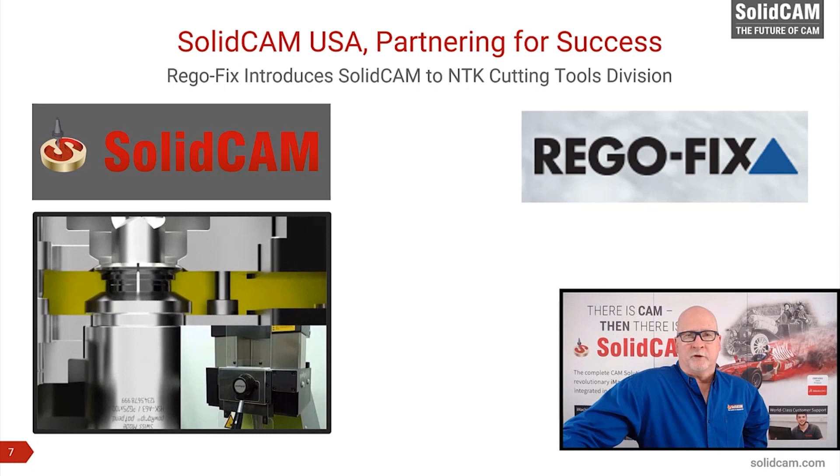Now, we do a lot of cross-promotional marketing with them, and we share booth costs at several industry trade shows. They've also introduced us to other valuable business alliance partners. This is one of the real benefits.

One example is the work that we're doing with Rego-Fix and NTK cutting tools. NTK is a division of NGK spark plugs. You may have heard of them. But the NTK cutting tools division, one of the tools they make is a ceramic end mill. It's a special recipe of silicon nitride. This doesn't even feel like a real tool. It feels like a piece of plastic when you pick it up. But what it can do in ultra-high temp alloys when combined with iMachining and Rego-Fix holders is nothing short of amazing. This material in this video is Rene 65.

It is used in jet engine hot section parts, and it sees some of the most extreme heat and pressure known to man during flight operations. A typical carbide tool, even when used with iMachining, is very limited in performance and has an extremely short tool life in this material.

Now, NTK, with this ceramic tool, was able to improve performance and tool life over carbide by about a factor of 2 with traditional tool paths, and even 3 to 4x with all of iMachining's competitors. They still had to do an awful lot of editing in the NC code to get it to work.

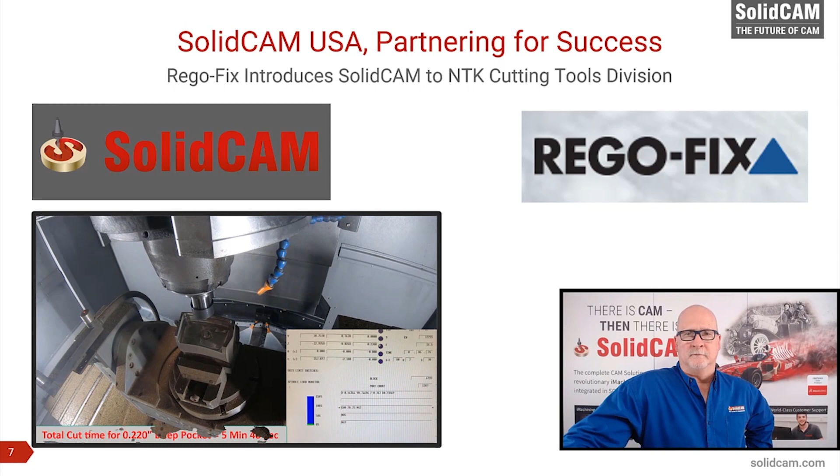You know, sometimes convincing partners to believe in SolidCAM can be challenging, especially with the way things are in the market today. But hey, have some fun with it. Get creative. SolidCAM will not let you down.

In talking with Yvonne at SolidCAM CZ, he related an interesting story to me, and I wanted to share that with you today. Back in 2015, Yvonne had some business alliance partnerships with some important cutting tool manufacturers like ISCAR, Gühring, WNT, and others. Unfortunately, these partners suffered from what we like to call the iMachining disbelief syndrome. This is a common affliction, but it can be a lot of fun to cure.

Being focused on and actually quite proud of their cutting tools, they were not willing to believe that iMachining was any different than any other CAM system offering. They figured that our testimonials were just exaggerations, marketing lies like so many of the others in the industry.

So Yvonne came up with a brilliant plan. He really wanted his business alliance partners to be excited about SolidCAM. So he thought, get them to compete. Challenge their confidence. And so he offered them an opportunity to test their tools and their expertise against iMachining.

Do your best, he said. Use the best approach you know and run your tools to the max feeds and speeds, the best you can get out of them. Then let me run them in iMachining and we'll compare the results.

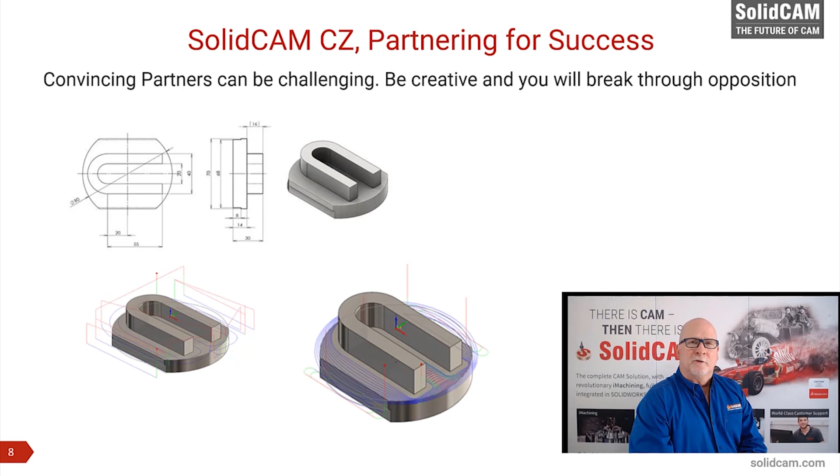So Yvonne chose a good machine, a DMG Mori. He got a DMU 65 monoblock. And hey, no one can complain that the machine was insufficient, right? It's definitely up to the task.

So Yvonne made the rules of engagement very, very simple. Use any solid carbide tool with traditional toolpath techniques and optimize them. He was going to use their 8mm diameter tools, using them with iMachining.

Now, they did the machining at the University of West Bohemia in Pilsen, with the professor of the university overseeing the contest, so this made it fair. And they used several materials ranging in hardness and toughness. They even gave the ISCAR team an advanced day to practice and perfect their approach. And Yvonne and his team showed up the next day and used default settings in iMachining.

The results were amazing. SolidCAM won hands down in all categories. Yvonne has all the results and the information if you're interested in seeing the details, but here's just a few bits of information.

An interesting and surprisingly common discovery was made in this challenge, and that was that iMachining is outperforming the other guys with about half the diameter of the tool that they're using. Now keep in mind tooling costs. Larger diameter tools cost significantly more, so this is a fantastic side benefit that can be gained also.

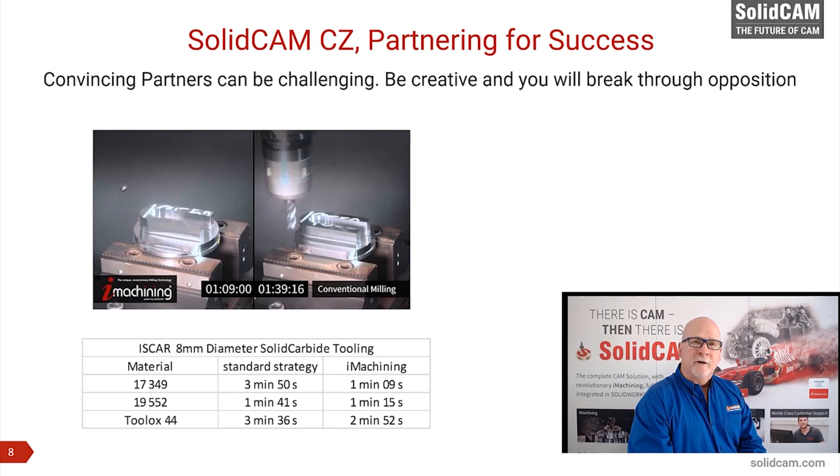Now, as you can imagine, with iMachining outperforming the traditional strategies by 30, even up to 300%, it's easy to see how the cutting tool manufacturers were converted to believers in SolidCAM. Now they are actually some of Yvonne's greatest promoters of SolidCAM and iMachining.

So work with your business alliance partners, because working with business alliance partners and customers for that matter, and helping them to understand SolidCAM's value can be some of the most fun and rewarding work that you'll ever do. So enjoy it. Build those relationships. Grow those relationships. Everybody's going to reap the rewards.

Building a great partnership takes a significant amount of time and effort. That process is not wasted though, for there will be times when that partner will bring you in on a project that demonstrates the value of your efforts.

Gordon from SolidCAM UK related a story to me just the other day that is just such a situation. Their long-term relationship with ISCAR paid off in a big way for both them and for a new customer in this case. As Gordon tells the story, the real partnership driver in this case was ISCAR. Now he says that ISCAR is their longest partnership and one of their most influential.

An opportunity came about in which a world-class hydropower turbine manufacturer, a company called Gilbert, Gilkes & Gordon, generally referred to as Gilkes or GG&G, had decided to bring turbine runner machining in-house, and they were looking for solutions.

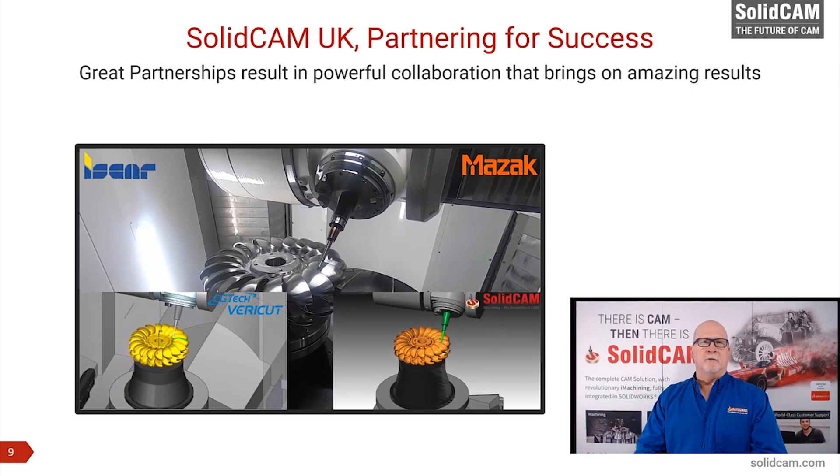Historically, Gilkes had outsourced the manufacturing of these turbine runners because they're very complex parts, and machining it complete from billet is a huge undertaking, to say the least. Their hope was that bringing it in-house would reduce costs, improve quality, and shorten their lead times.

Gilkes made a decision to go with Mazak. They purchased an Integrex e-1250V/8S. This is an advanced 5-axis mill turn machine that will work great to do these runners.

Although SolidCAM UK has been trying for years, they had not established an official partner relationship with Mazak. Now, on a previous project, Mazak had chosen to work with ISCAR as their tooling partner, and due to the history of excellence that ISCAR has experienced with Gordon and his team, ISCAR insisted that SolidCAM be brought in as the CAM partner for that project.

Now, although Mazak was accustomed to working with hyperMILL and Edgecam, they took the advice, and on the recommendation of ISCAR, they brought SolidCAM UK and Gordon's team along with them, and you know what? That project worked out well.

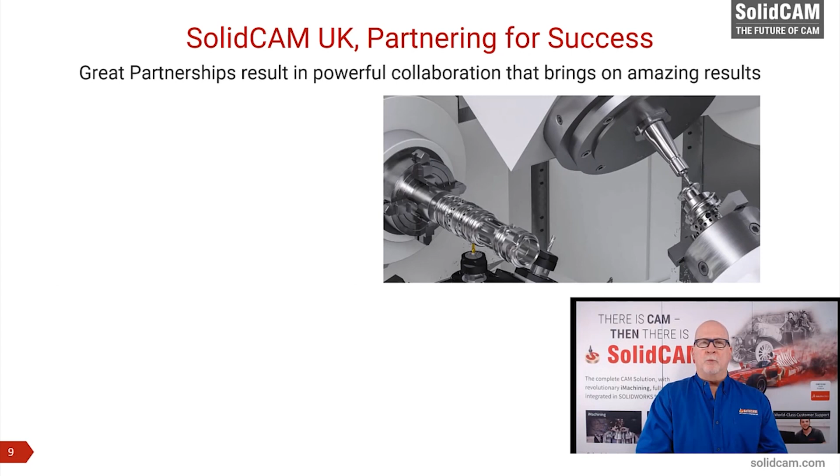So this time, with Gilks being a big opportunity, with great potential for Mazak, they chose to go with SolidCAM again, with the hope that SolidCAM's advanced mill turn and 5-axis modules would offer some real programming power.

SolidCAM UK did with this Gilks project what they had done so many times before when working with Mazak. They provided superior product, service, and support, resulting in a very, very happy customer.

The senior project engineer at Gilks had these comments regarding this project. Quote: 'The project was to machine complete a Pelton turbine runner from a solid billet of stainless steel on a 5-axis mill turn. Pelton runners are complex parts, so support was needed with the programming.'

He goes on to say, quote: 'SolidCAM provided training to our requirements, giving programming assistance when required both on-site and remotely. They also provided a post-processor with all custom requirements built in, and every function of the machine set up and tested to provide Gilks with a reliable manufacturing process to help proof Gilks' investment.'

As you can see in this example, the customer partnering with SolidCAM UK, Mazak, ISCAR, Brown & Holmes, Nikken, CG Tech, which is Vericut, has meant that the Gilks project, although complex and challenging, became a reality, including significant improvements in productivity that allowed Gilks to maintain their highly competitive position in this global market.

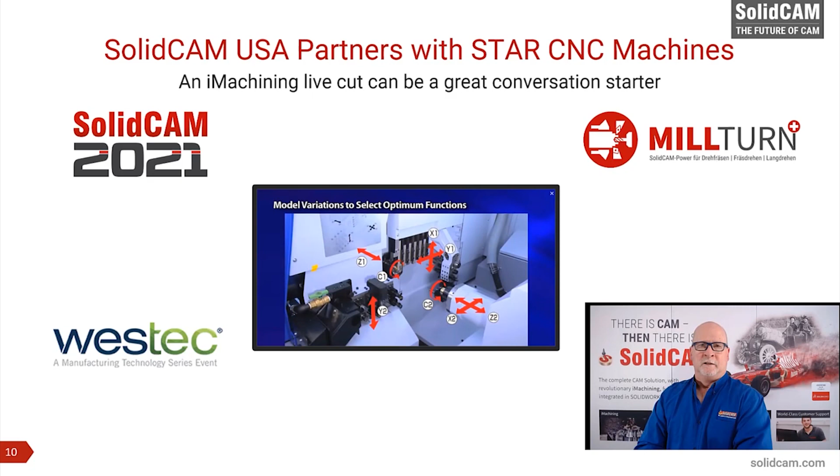The frustration brought about by that was evident with the first individual I spoke with, their booth manager. He basically told me there was no chance for us to become a business partner, that they just were not interested.

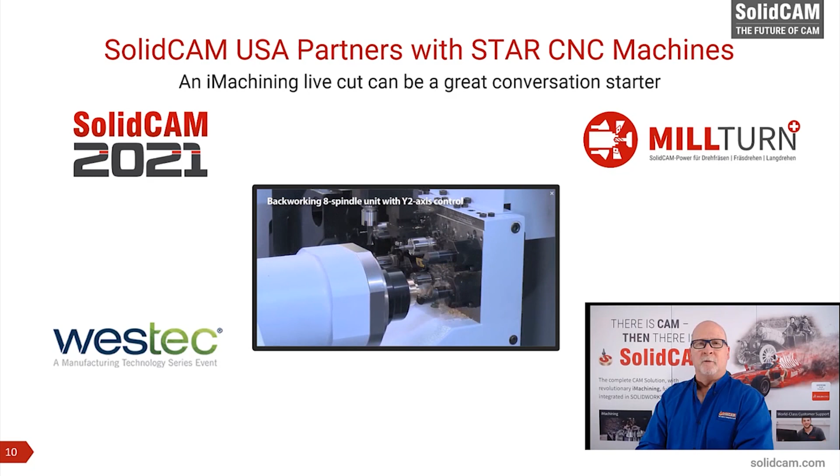After a few minutes of resistance, I was finally able to get him to identify and let me talk to the person with authority to make that decision. Their national sales manager was working the booth, and after he finished with a customer, he politely introduced himself and shook my hand. I told him the purpose of my visit, and again he immediately objected, saying they already had all the CAM partners they would ever be interested in.

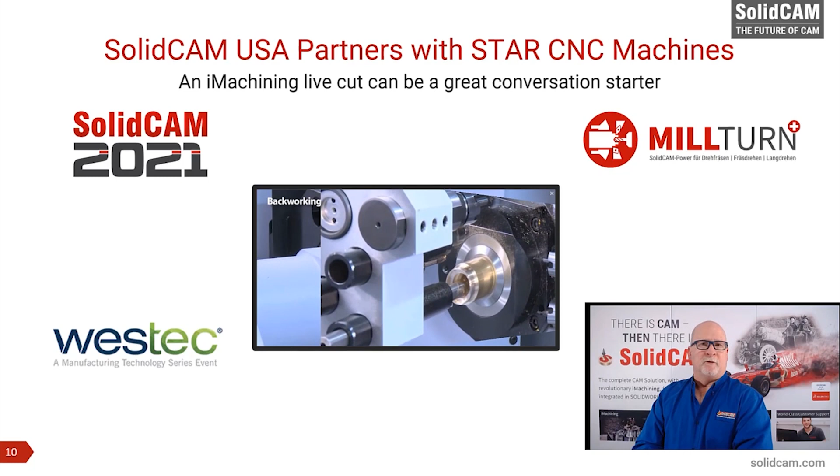But before he could dismiss me, I told him I really did understand. I said, I'm sure you guys get requests all the time from CAM systems that really have no business attempting to run your complex machines. I assured him we were different, that we had spent the last several years upgrading our system specifically to handle complex machines like Swiss turn machines.

After several minutes of persuasion, he finally relented and said I could talk with Ken Jensen, their West Coast Senior Application Engineer. It was still painfully evident he didn't believe me, but he said if Ken Jensen thought it was worth looking at, they'd be willing to take it under consideration.

Ken was off on a break at the time, so he suggested I come back in about 30 minutes. So I went over to the Citizen booth, just down the aisle, to see if I could start something up with them. This was a complete non-starter. They were even more against any new partners than Star was, and my request at Citizen was met with rude dismissal.

Not wanting to miss the opportunity at Star, I decided to pursue Citizen at a later date instead. I grabbed a cup of coffee and waited a few minutes at the Star booth, hoping to catch Mr. Jensen as soon as he came back, before he got involved in anything else. That was the right decision, because he came back shortly after I got back to their booth.

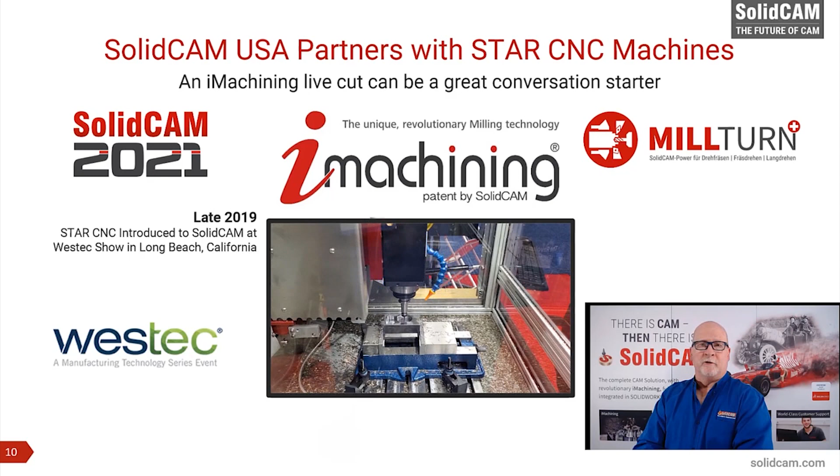So I ran the iMachining demo with my usual narration, talking about the science of cutting angle. When I finished, I looked over at Ken and his face told it all. His eyes were wide with disbelief and amazement. The first words he spoke were actually questions.

What did I just see? How are you able to do that with such small tools on a desktop CNC? And then he said, can you do the same thing on Swiss machines?

I smiled at him and said, you bet we can, and wait till you see what else we can do on Swiss. Mr. Jensen looked me straight in the eyes and said, well okay then, you've got my attention now. So I walked him over to the demo station and asked Greg Payton to show him what we can do with Swiss.

Greg did a masterful demo, walking him through the VMID, the MCOs, machine view, tool mountings, channel synchronization, and our machine simulation.

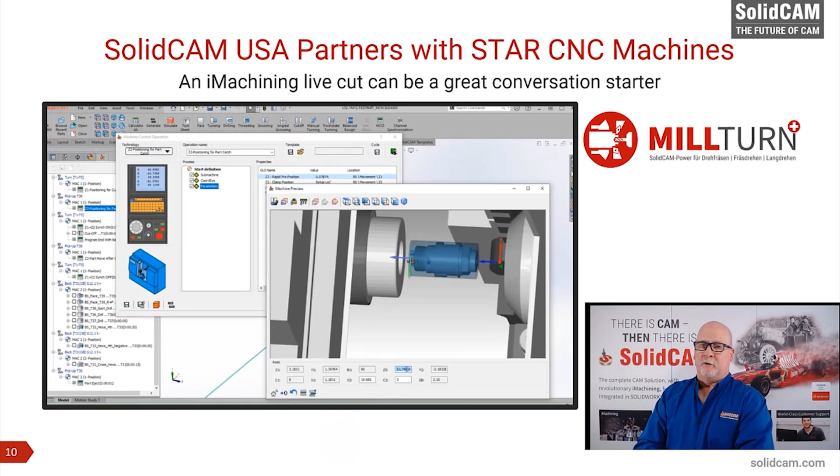30 minutes later, Ken Jensen told us he was really surprised. He quite frankly expected to see the same old tired attempts he had seen before from others over the last years. But he said he actually liked everything he saw.

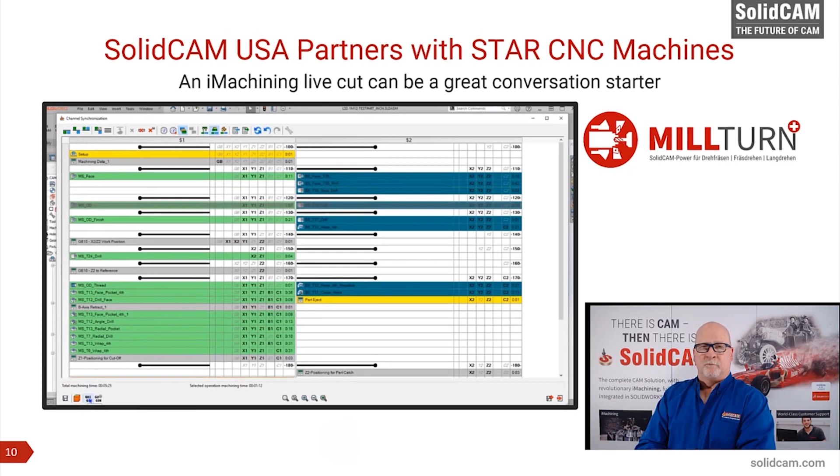He especially liked the VMID alignments, the channel synchronization, and the machine view. He said the machine view was very powerful to be able to see in a visual way how things align during the programming of the machine control operations, and the tool mountings is something they had wanted for many years.

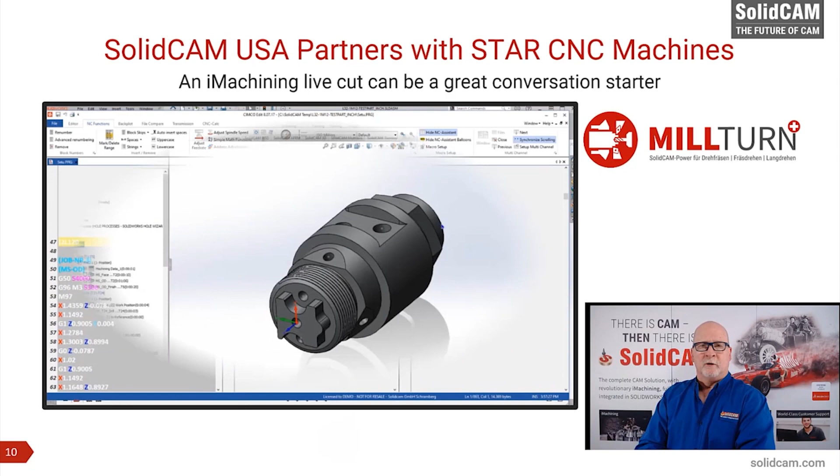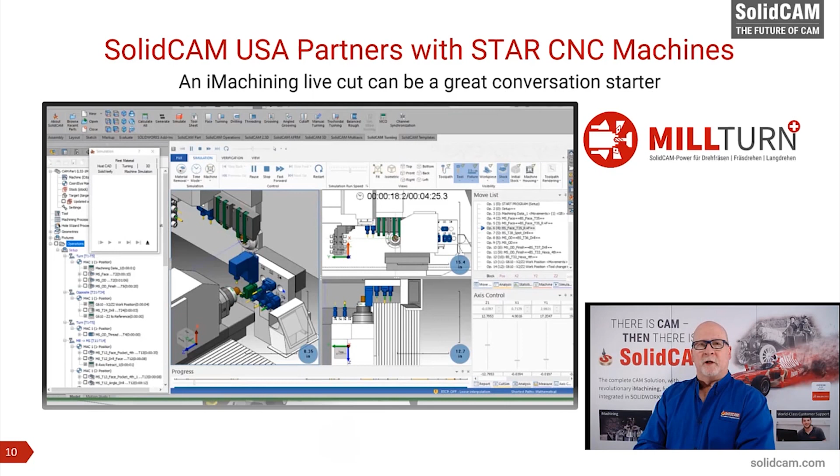Then he asked if he could get a seat of SolidCAM to start learning it, and maybe even use it to demonstrate his machines. That's exactly what we were hoping for. Since then, we've signed agreements with Star in California, and Ken has been working under the excellent guidance of Greg and using the software a lot.

Unfortunately, COVID slowed it down for us like it did with everything. But we are now set to work with them at WESTEC later this year in September. Ken's also trying to get me in touch with their Ohio team, and I'm trying to get to work with them at the PMTS show in August of this year.

That's out in Cleveland. I think the main takeaway from this story is that you should never, ever give up. Always be persistent, polite, and professional, but persistent. And whatever you do, don't forget iMachining is a serious, eye-opening technology. Sometimes, actually quite often, it makes all the difference in the world once they experience it in a live cut.

We've now seen just a few examples of how our teams worldwide are working with their partners and creating great rewards for customers, as well as for the partners, and of course for SolidCAM. When we work together, we create great opportunities to meet the needs of our customers in ways they may not even be thinking about.

There are so many technologies out there that are pretty cool in and of themselves, but when we, SolidCAM, bring them together in an interdependent way, each capitalizing on the strengths of the others, we can achieve stunning results for our customers. I believe in a philosophy that I think really works.